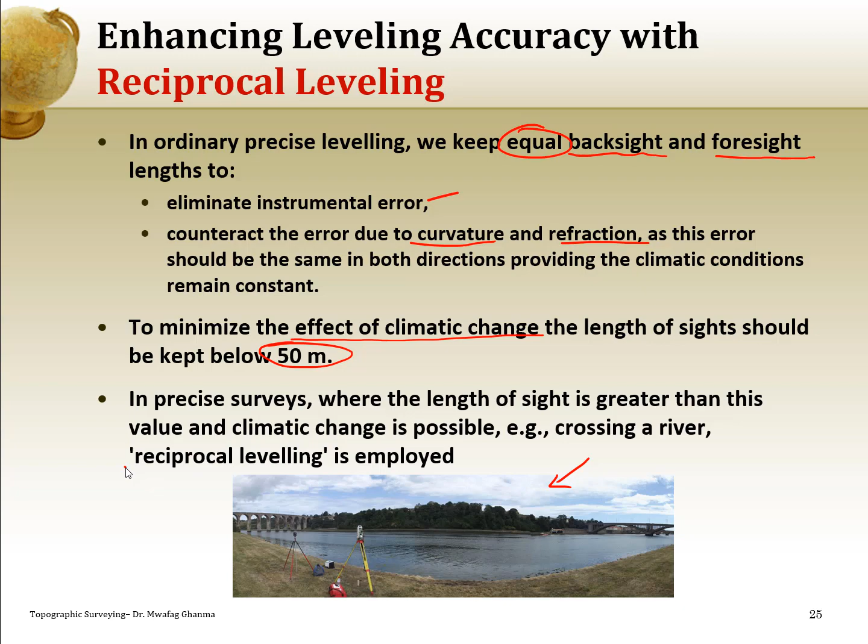So reciprocal leveling is a method to deal with the situations where we cannot put the instrument in the middle. We will show you here two cases. Case one, two independent setups. What do we mean by that? We take the instrument when it is close to the first point. We take a backsight. Of course, this is the benchmark. As we learned in surveying, we always take a backsight at the benchmark. Point B is the point of unknown elevation.

So at the first measurement we put the instrument near the benchmark, which is point A, take a backsight on the benchmark and a foresight at the unknown point. Now we will take the instrument to the other side, or put another instrument on the other side, and this is what we call simultaneous leveling, which means we take the measurements almost at the same time, because we don't want the atmospheric conditions to change and the measurements to not be as expected.

So first we put the instrument near the first point, take a backsight at the benchmark, then a foresight, and calculate the elevation of point B, which we can call elevation of point B1. Then we move the instrument next to point B, and again take a backsight at the benchmark. This is the second independent measurement. We take the backsight at the benchmark and the foresight at the unknown point, calculate the elevation of point B a second time, and average these two measurements. So this is the first method.

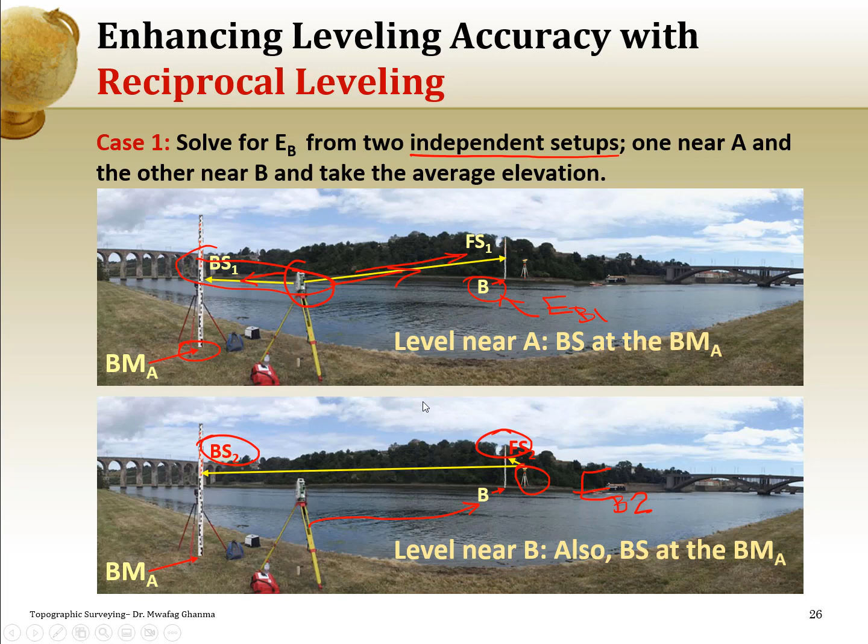The second method is a little bit different: we want to do a closed loop, starting from A as a backsight, then take the foresight on point B and calculate its elevation, then continue from point B as a turning point. We put the instrument at the second point and continue. We will not backsight on the benchmark; we continue from turning point B and close on the benchmark. Then we will have two values: the given elevation of benchmark A and the computed elevation when we complete the loop.

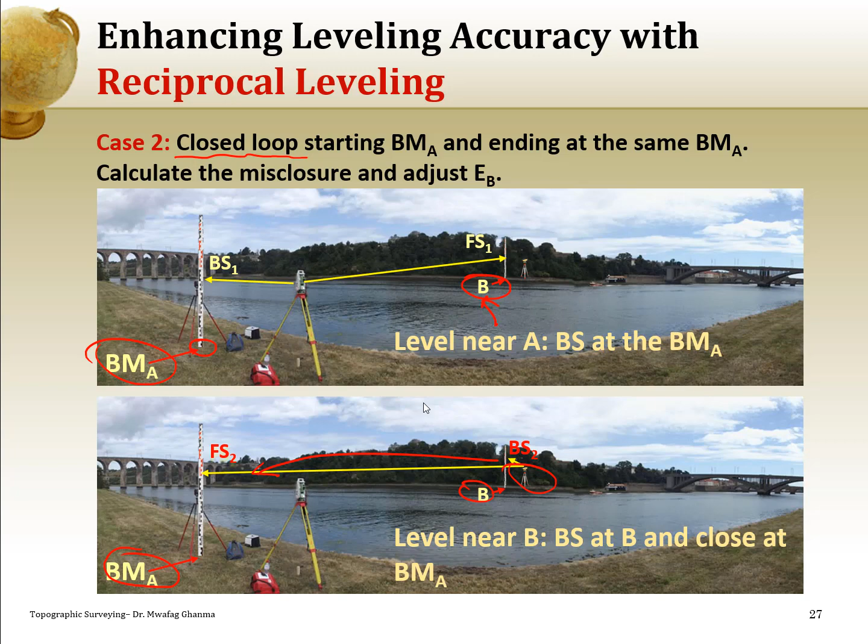The difference is what we called in the surveying course the misclosure, and we will take this misclosure and distribute it by recalculating the elevation of point B, or give it a correction. We apply the misclosure to point B, and point B after this correction will be the final value. So let's see the equations.

Here in the first case, it is as simple as taking the instrument at the first position, taking backsight RA and foresight RB, as we know from surveying. This is the reading with the instrument at station A, near the first point. How do we calculate the height of the instrument? By adding the reading of the backsight, RA, to the given elevation of benchmark A. This is the height of the instrument.

How do we calculate the elevation of point B, the unknown point? By taking the foresight reading, RB, and subtracting it from the height of the instrument. So in the first case, EB1, the elevation of point B from the first setup near point A, will be the given elevation of the benchmark plus RA, the backsight, minus the foresight.

Now we will take the instrument to near point B, and we'll do the same thing: we are taking a backsight at the benchmark. So this one will be R prime A, backsight on the benchmark, and then foresight on the unknown point. But this time the instrument is close to point B. So the height of the instrument, again, is the elevation of the benchmark given plus the backsight, which we call here R prime A.

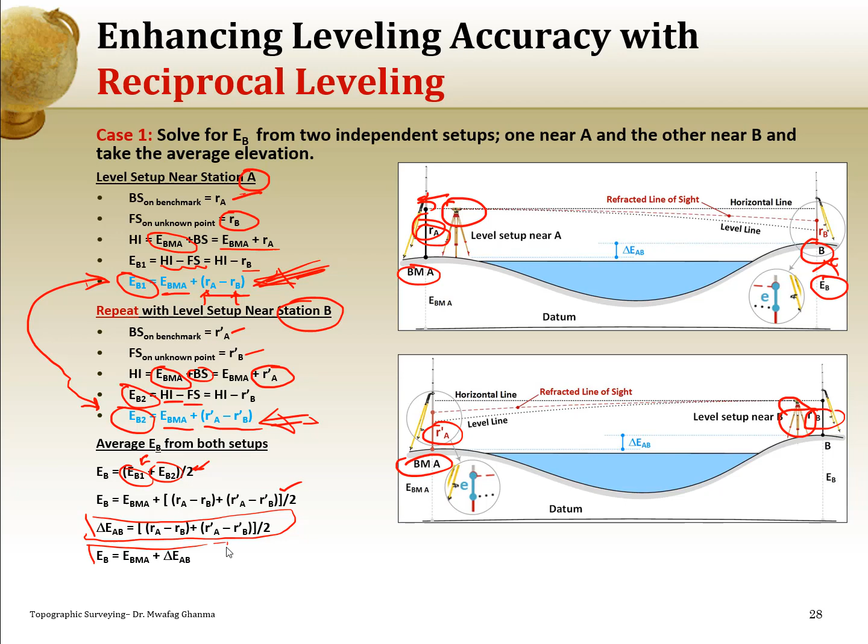And if we replace elevation of B1 by its equation here, and the elevation of point B2 from the second case by its equation, we just put them here and we come up with the difference in elevation between these 2 points as this, and at the end we will have the elevation of point B equal to elevation of benchmark plus the delta elevation between A and B, which can be calculated from this equation.

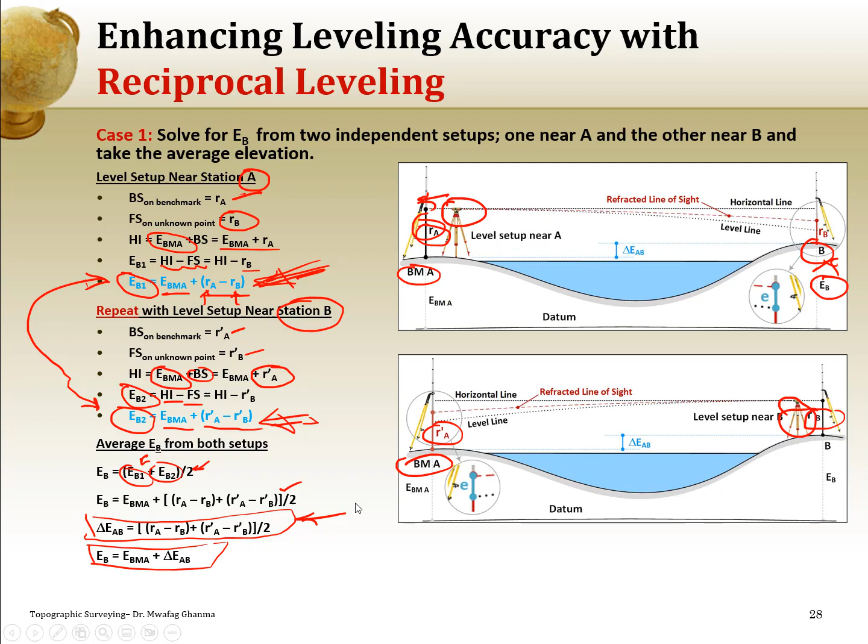As simple as that. Now, this is a numerical example; it is just direct substitution in the previous equation. Let's see, what do we have? So as we said, at setup number 1, when we have the instrument near station A, which is the benchmark, we have the given elevation of the benchmark, we assumed it as 100 meters, and then reading at A, backsight, and then the foresight at point B, the difference, and calculate elevation of B1.

Then go to station B, take the instrument near station B. The same thing, we have the benchmark at 100 meters. Take the backsight on the benchmark, the far point now. And this 1.3, take it to the near point, which is B, the unknown point. Then again, R prime A minus R prime B, and this will be minus something. As we saw from the equations, we add the elevation of benchmark to the difference, and this will give me elevation of B2.

So we have now one elevation and another elevation from the first setup and the second independent setup. They do not share any information in the measurements. And then we take these values. As you can see, they are different. So we take their average, and this is the final elevation of point B.

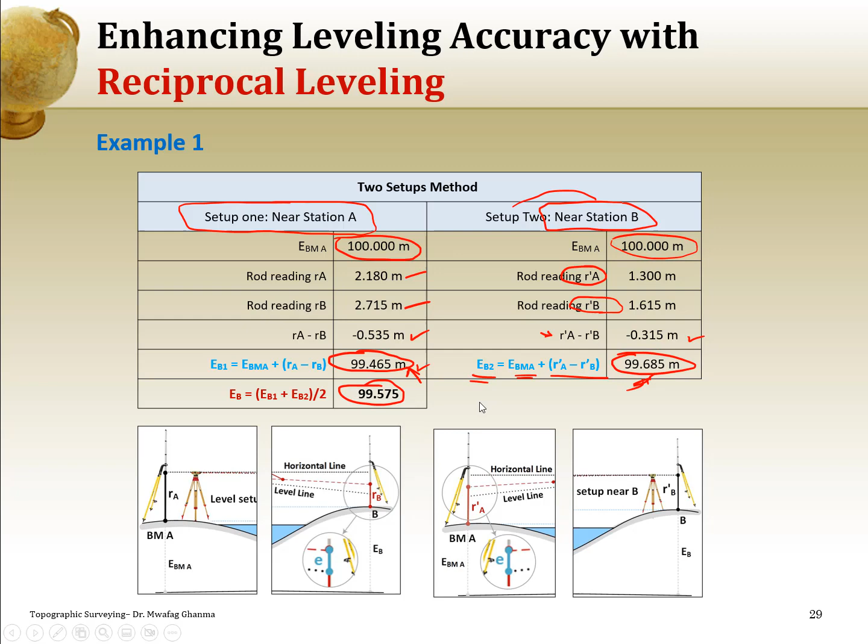Let's see the second case where we will do a dependent loop. We start a loop from the benchmark and we'll go to B, and we take here a backsight and then a foresight. Then we'll take the instrument from near A to near B. And again, we will deal with B as a turning point. At the turning point, we'll take a backsight, now at the turning point, not the benchmark like in the previous case. And then we'll read also foresight 2. We finish the readings; now for the calculations. How do we do that?

The first setup, when we are at the benchmark, the reading is RA, the reading is RB, and then the height of the instrument of setup number 1, which is here, the height of the instrument above the datum, and this is HI1, height of instrument 1, setup number 1. So the height of the instrument equals the elevation of benchmark A plus the backsight, which we have here as RA.

Then how do we calculate the elevation of point B from this setup? This is the elevation of B, and this is equal to the height of the instrument minus the foresight reading, which is RB, and at the end, the elevation of point B in the first setup is elevation of benchmark A plus the difference between the backsight and the foresight.

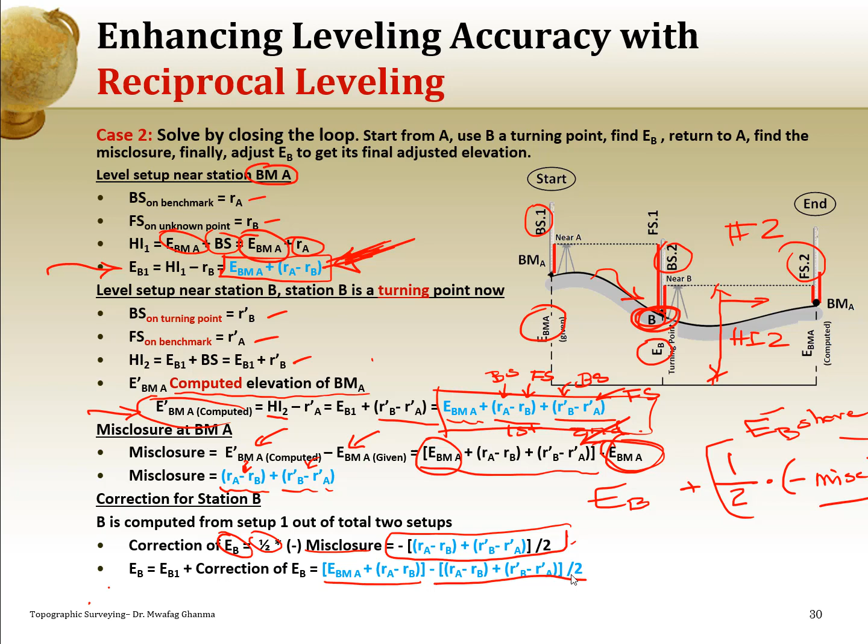So elevation of point B from the previous equation, and elevation of point B, as we said, is from here, and then we put the correction, and that's it. This is the final elevation. Let's go for a numerical example and see. So this is a numerical example.

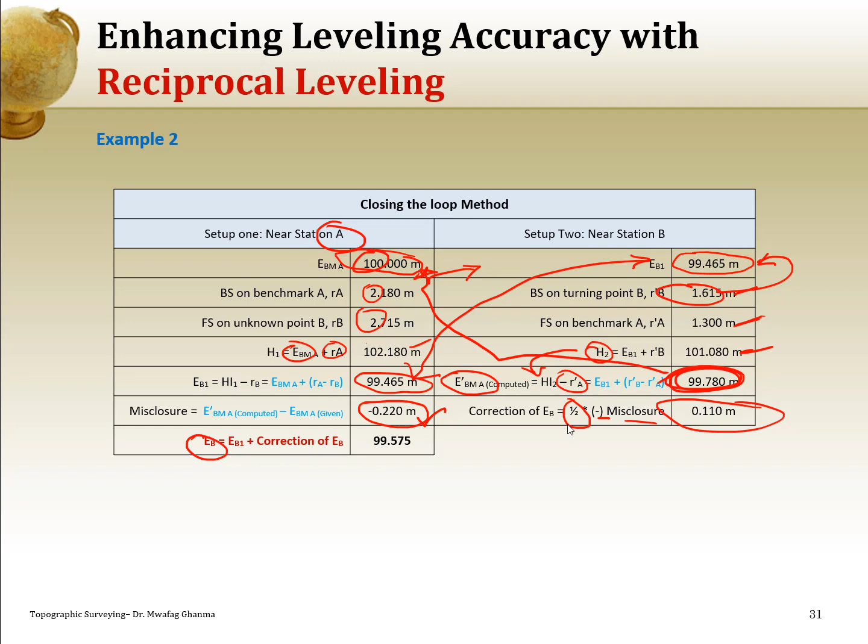What is the share of point B? As we said, it is 1/2 because point B was calculated from the first setup out of 2 total setups, and there is a negative sign of the misclosure, so it is minus 1/2. It's 0.11 multiplied by a negative sign, so the share of point B is 0.11 meters. So what is the final elevation of point B? It is the calculated elevation from setup number 1, and you add to it 0.11. This is the final elevation of point B, and this is exactly the same elevation that we found when we did the procedure in case number 1. So for now, this is the reciprocal leveling.